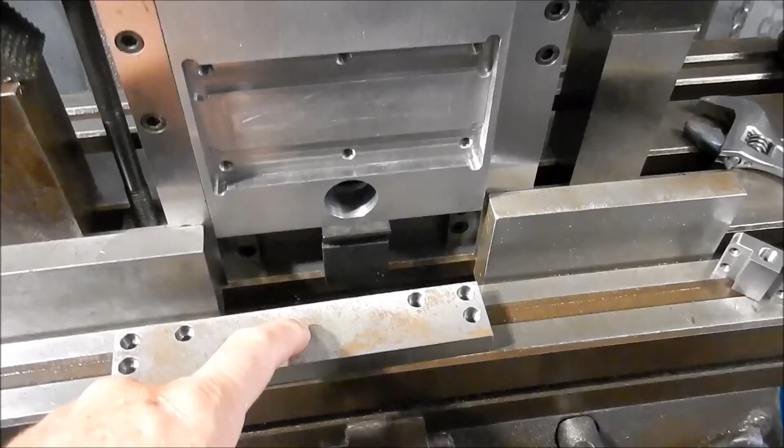We're going to set up to do the boring in line for our bushes for our actuating screw, which is going to actuate this plate up and down to allow us to get the centre height of the lathe and also to side cut to open up our keyways.

Just having a look at the setup here. I've got the slide plate sitting on top of some step blocks at the moment, just to get it up nice and close to where that bridge piece sits. I've used my edge finder and picked up from edge to edge to get the exact centre, and I've picked up that edge there and come back 1.5 millimeters, so I know I'm dead smack on where that threaded hole is in the nut.

So the plan is that I'm going to remount our bridge piece. I'll pull out the step blocks and drop that slide plate down. We'll center drill and open that up and bore that to size, and then I've got a counter bore that I need to do in the back end of this.

So we can either do this on the mill, or I might even set it up in the lathe on the four jaw and clock it, and then we'll counter bore it back in.

What I'll do before I take this off is drill through and dowel so that this goes back in the exact same position every time if I do need to remove it, and I know that it's dead smack centre to the nut each time as well.

And then what we'll move on to is we might make up the screw for this. I've made a few design changes to this - I'm actually going to put some indication lines around a collar on this, and look at making it a little bit differently. I wasn't happy with the way I designed this setup, so we'll go through that before we start as well.

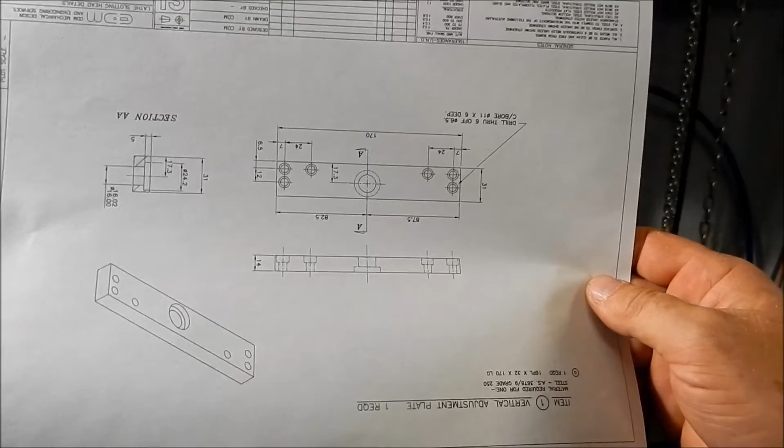Right, just before we kick off, we'll show you what we're looking at here. This is the hole we need to drill through, a tolerance hole, 16mm nominal, and then we've got to do a little counter bore in the back end there, and that's the one I said we might just set up on the lathe and do in the four jaw. So we'll get this underway.

One of the things I love about having a riser, even though it's a 2-inch riser, it just gives you a little bit more capacity on that headroom.

Right, we'll set up and get the boring head in now, and we'll start boring that out to 16mm. I've got the boring bar set up. I'm just going to take a lick on this. We'll do a size check on it and see what we've got to do with the boring head to bring that out to 16.

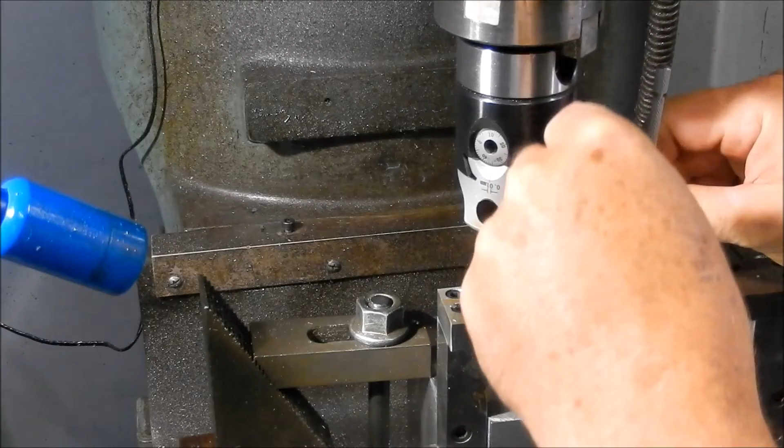Right, 15.2, so 0.8 of a mil to come off. Now, this hole isn't real critical - I've got a tolerance, but I can make the bush to suit. But I like to try and hit my tolerances. We'll see how we go.

And that's the great thing about having a digi-read out. I can move this out of the way, do my measurement, and come back on - come back exactly to 0.

So I'll take 1/4 mil out. Check that again.

Bit of a squeal there. I'll slow that down a tad.

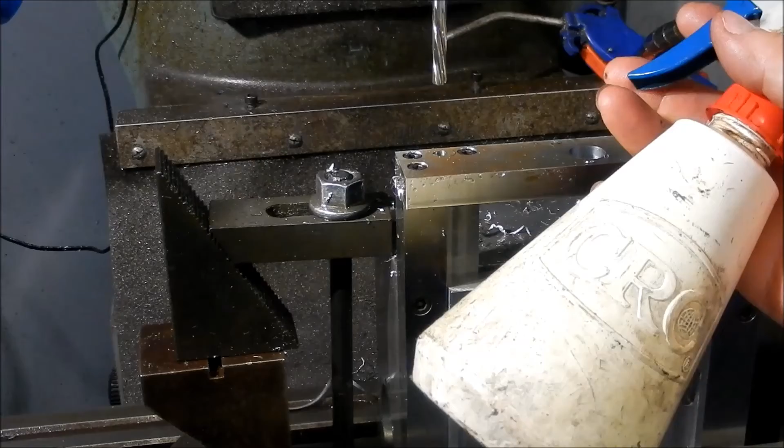I always tend to use a light cutting fluid. I use CRC for this sort of work. I find that if I use a thicker oil, it tends to drill or ream slightly oversized, and I've had in the past where I've had to send dowels out to have them chrome plated to build them up, particularly on large fitments.

Large precision fit machine elements that you might be doing on site - the old mag-based drills aren't exactly the greatest in the world for accuracy, particularly if they've been hired and used a fair bit. The slides aren't real flash, and the bearings aren't too flash on the chuck, and they tend to definitely drill oversize and ream oversize. So if you're ever doing fitments in the field, just be aware of that.

As I said, I've had to send the stuff out in the past to have the dowels chrome plated to build them up. Right, so we're into back gear, so we'll slow this right down.

That looks pretty good.

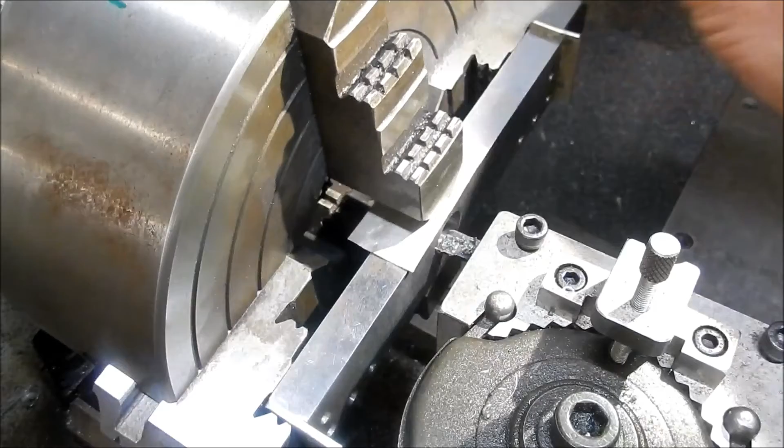Alright guys, so I've got this set up and clocked now. We're going to take this out to a diameter 24 by 5mm deep. I've just touched off on the inside, we know that's bang on 16. So need to come out 4mm on the radius and 5mm deep. So we'll get that on the go.

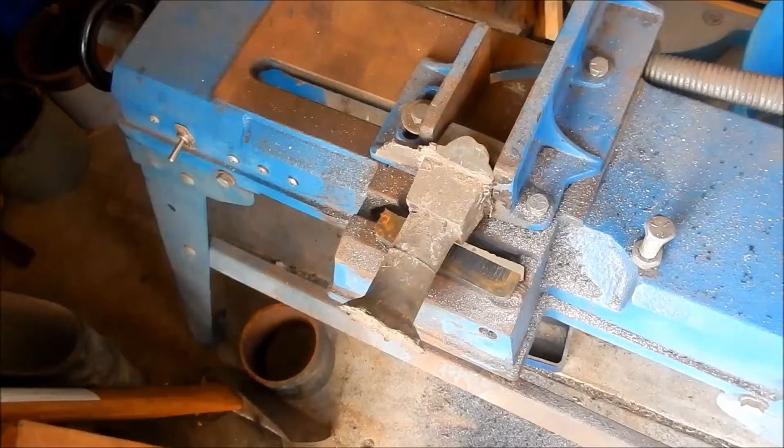Okay guys, I was going to make these thrust washers for this actuating screw out of some dowel rods, but unfortunately I haven't got any dowel in that size. I thought I did, but I haven't. I've just got an old riser off a casting job I did a while ago. This is LG2, so we'll cut it up out of that, and we'll get started on it.

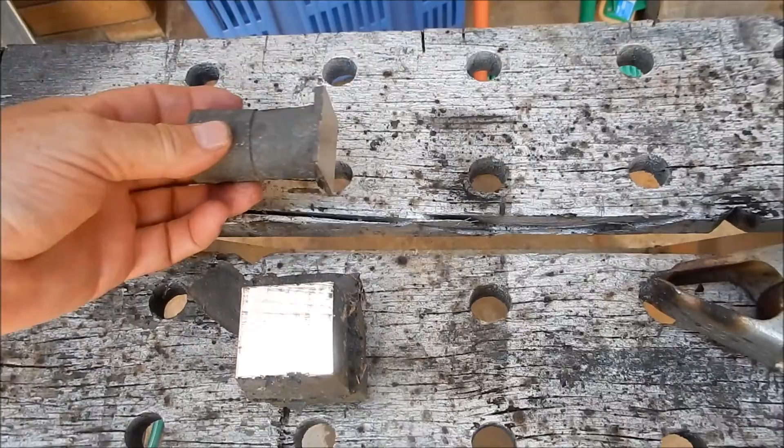Alright, so that's our little bit of scrap we've cut off that we're going to use as a bit of stock. It's got a little bit of a shrinking trough in here, which is what you expect out of the risers - that's what they're there for. Just something I'll show you for those guys that are the casting buffs - you'll see inside here, almost like a fabric.

Now, I always put filters in when I'm casting to take out any dross or any rubbish that I might have missed, or that might end up going down the riser. So it's really good, I've never had any issues.

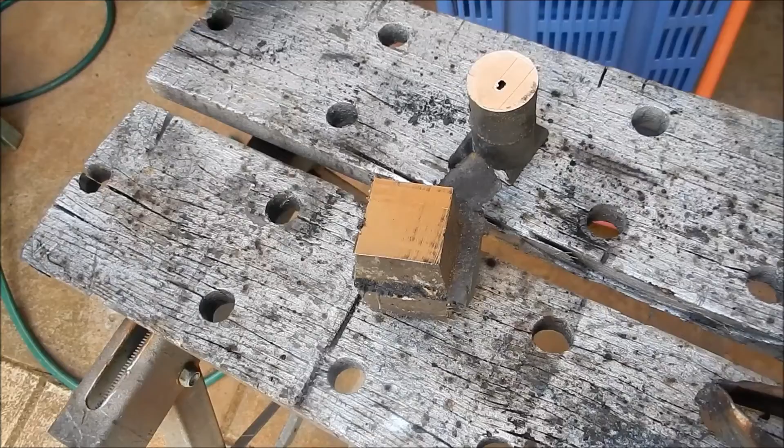So it's always handy having those little bits of offcuts here, you can always use them for little bits of stock and bits and pieces. Alright, we'll get this set up in the lathe and we'll make a start on it.

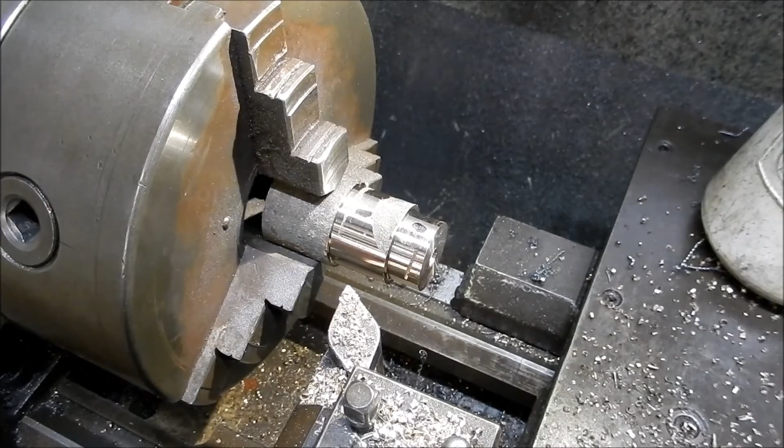Right guys, I've started just machining this out. I've got a nice little blowhole in here. As I said, these are just the runner risers of castings that I've done, and they're often full of rubbish. Sometimes they're good - at the start of the pour they're not too bad. When you're getting down towards the end of the crucible, you'll often start getting a bit of rubbish coming through. That's why I use filters. But we'll see how we go anyway.

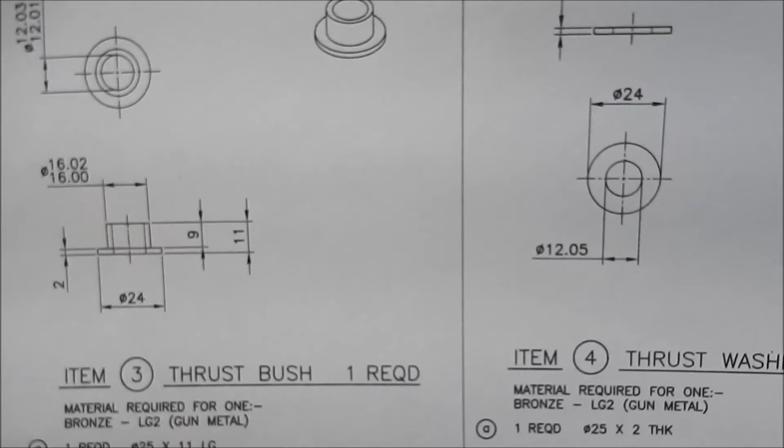But what we're going to be making up are the bush, thrust bush, which is this one here, and then we've also got the thrust washer that we're going to make up as well. So both diameter 24 max diameter, and a slide fit diameter 12 to suit the shaft on the screw.

Alright, I'll keep going, we'll get some holes put through this and just see how that's looking inside as well. I'm just going to swap this tool around for a 0.4mm radius on that tip.

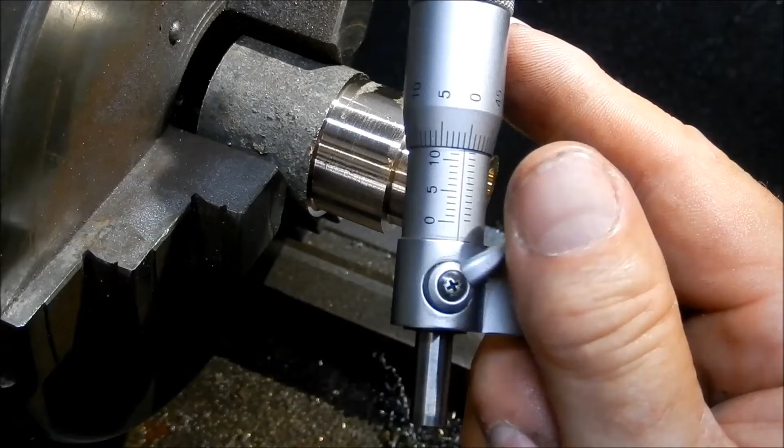Try and do this looking through the viewer. Right, that's it, we're bang smack on midway through our tolerance, so we're 12.02, which is bang on our mid tolerance range. Alright, finish out the OD and then we'll part that off.

Spot on, right, I'll leave it at there. Right, I'll just lightly deburr this and I'll part it off and we'll do the washer. Right, so we'll part this off with about 0.2 of a mil to clean up.

I'll face this off and we'll part the next little washer off at 2 mil. Righto, all done, we'll clean those up and we'll get ready for the screw.

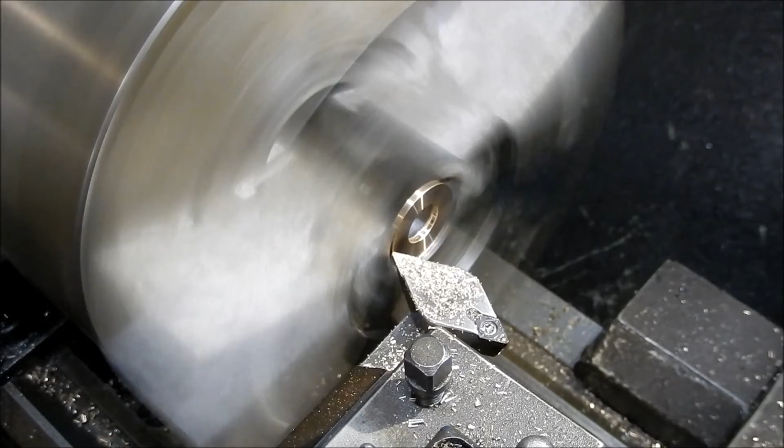I'll just put a little chamfer on that too. Done.

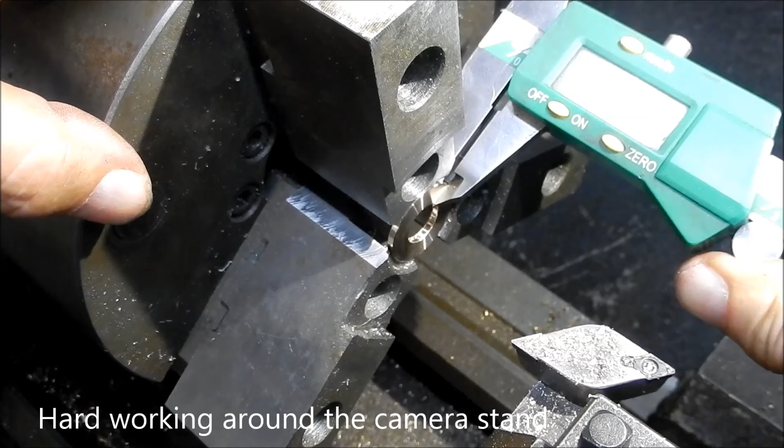Guess I should check it before we take it out. Yeah, gosh. Yep, 2.02, we'll leave it at that.

Righto, so that's our bushes and our washers complete, and it's done a really nice job. Alright, I'll tidy that up and I might get that bush pressed into place.

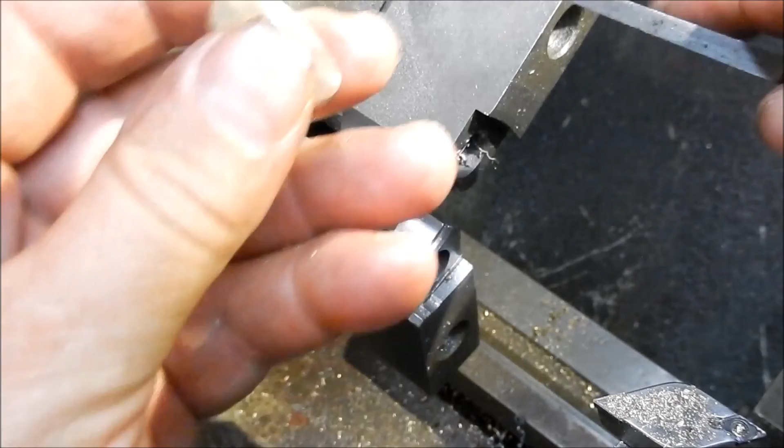One of my scrapers that I made up years ago when I was an apprentice, it's just a triangular file. You just grind it down, and it does a really good job at just taking that arris, putting that nice little arris around on thin objects. Righto, job's done.